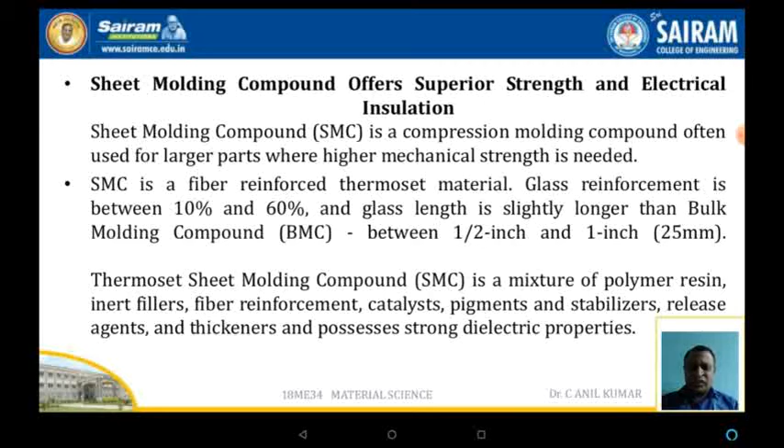The thermoset sheet molding compound or SMC is a mixture of polymer resin, inert fillers, fiber reinforcement, catalysts, pigments, stabilizers, and thickeners, depending upon the type of application where the SMCs are used.

Manufacture of the SMC is a continuous inline process. The material is sheathed both top and bottom with a polyethylene or nylon plastic film to prevent auto adhesion. The paste is spread uniformly onto the bottom film and chopped glass fibers are randomly deposited on the paste. The top film is introduced and the sandwich is rolled into a predetermined thickness. The sheets are allowed to mature for 48 hours.

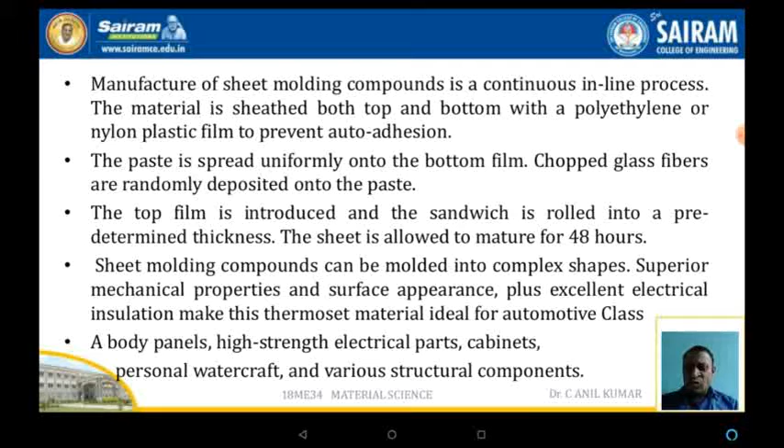The sheet molding compound can be molded into complex shapes. Superior mechanical properties can be achieved very easily. The surface appearance and excellent electrical insulation can also be maintained very easily throughout the material. Body panels, high strength electrical parts, cabinets, or personal watercrafts are some of the various applications with respect to this.

The schematic diagram of the SMC is as shown in this slide, which consists of the first one, the paste or matrix material, and the second, a chopped roving reinforced material, where both are mixed, and the mix is passed through compacting rollers, and afterwards what we obtain is a uniformly thickened sheet that is collected in a tank.

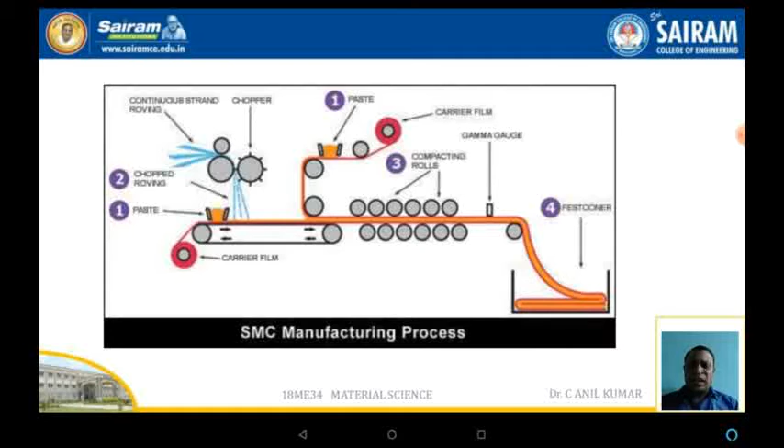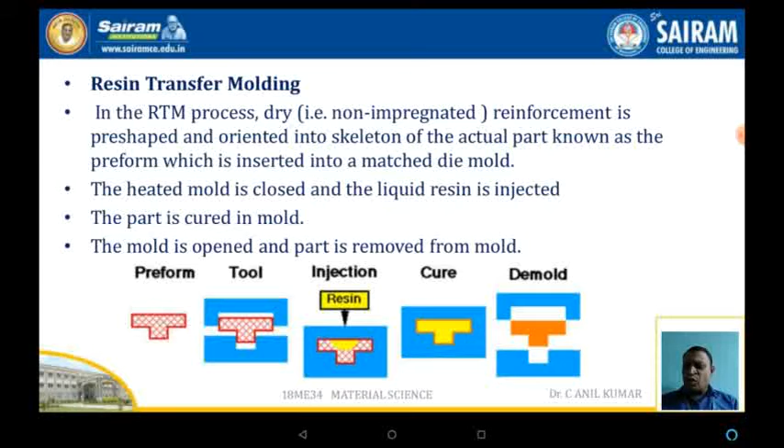The resin transfer molding, also called the RTM process. In the RTM process, either a dry reinforcement is pre-shaped and oriented into a skeleton of the actual part known as the preform, which is inserted into a matched die mold. The heated mold is closed and a liquid resin is injected. The part is cured in the mold. The mold is opened and the part is removed from the mold.

Transfer molding involves the following steps. The mold cavity is filled with preformed reinforcing fibers. The pre-weighed amount of polymer mixed with the additive and filler is placed into the transfer pot. The charge may be in the form of a powder, a pellet, a putty-like mass, or preformed blanks.

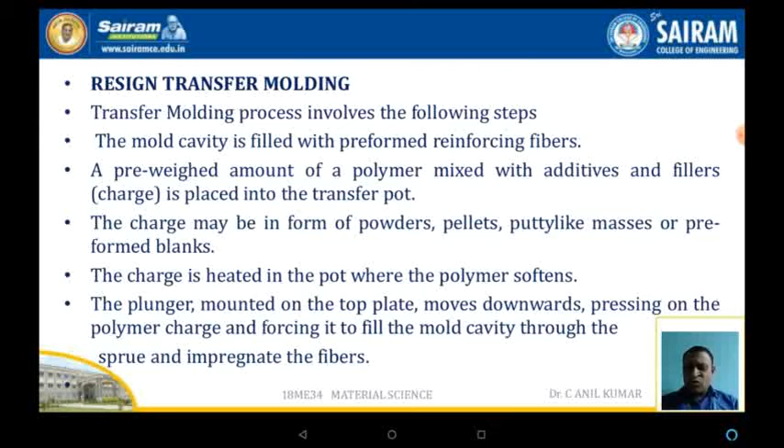The charge is heated in the pot where the polymer is softened. The plunger mounted on the top plate moves down, applying pressure over the mold and getting the required shape. The process is shown in the schematic diagram.

The top one is the plunger where the charge is placed in the transfer pot, and below that a sprue will be there. Below the sprue a mold cavity will be there. Because of the load applied by the plunger, the charge is transferred through the sprue to the mold cavity. Through the ejector, the dies can be opened and the component obtained.

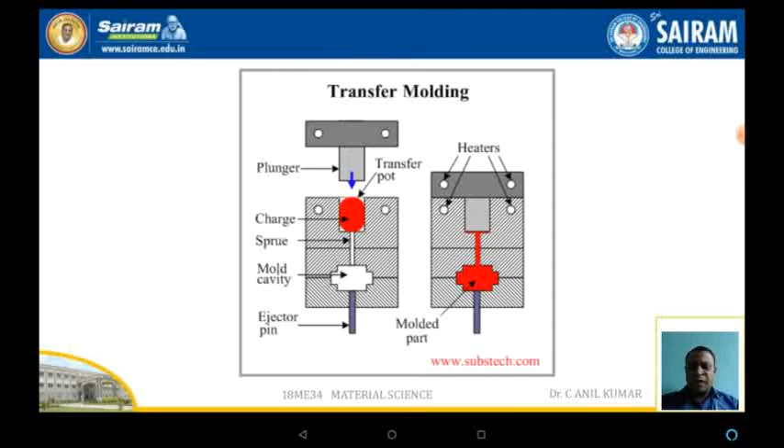The mold equipped with a heating system provides curing of the polymer. The mold is opened and the part is removed by means of ejector pins. If the thermosetting resin is molded, the mold may be opened in the hot state. Cured thermoset maintains its shape and dimension even in the hot state. When thermoplastic is molded, the molded parts are cooled down before opening.

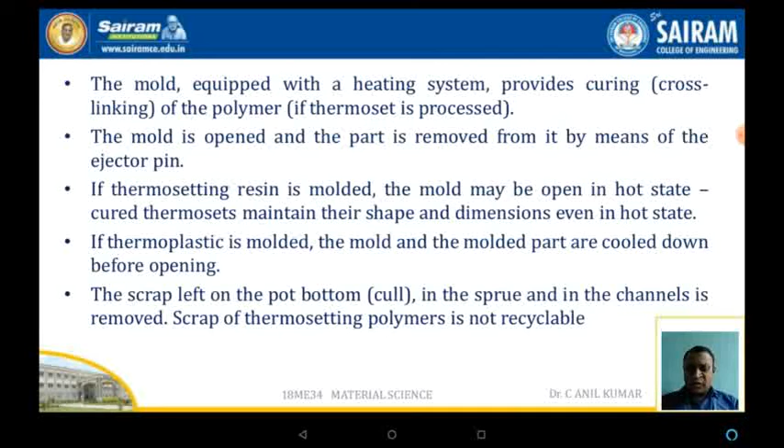The scrap left on the pot bottom in the sprue and channel is removed. The scrap of the thermosetting polymer is not recyclable.

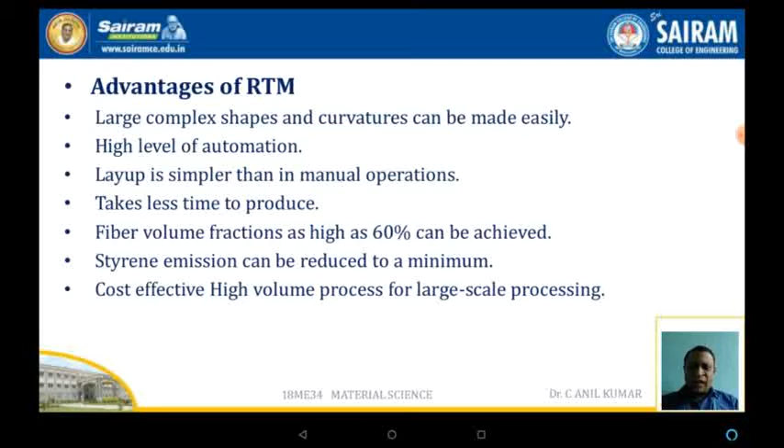The advantages of RTM: large complex shapes and curvatures or integrated shapes can be cast very easily. High level of automation - the layup is simpler than manual operation. RTM takes less time to produce. Fiber volume fraction as high as 60% can be achieved very easily. Styrene emission can be reduced to a minimum. It's a cost effective high volume process for large scale processing.

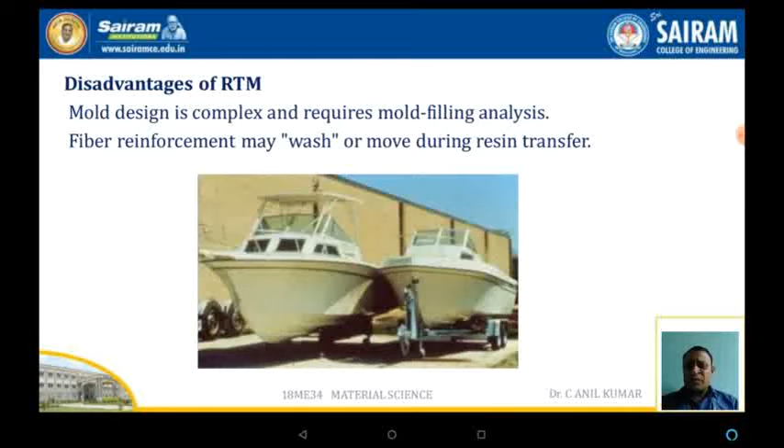The disadvantages of RTM: the mold design is complex and requires mold filling analysis. The fiber reinforcement may wash or move during the resin transfer. Here the boats are shown which have been fabricated using the RTM process only.

The next topic is the metal matrix composite. Metal matrix composites are composites with at least two constituent parts, one being the metal, the other being a non-metal, or it may be a ceramic material, or it may be an organic compound.

MMCs are made by dispersing the reinforcing material into a metal matrix, driven by the current industrial need for lightweight as well as high performing materials. The MMCs have emerged as the strongest contender against the monolithic materials as well as the alloys.

MMCs are used in aerospace industries, marine industries, and automotive industries. Aluminum metal matrix composites have a major application compared to other materials.

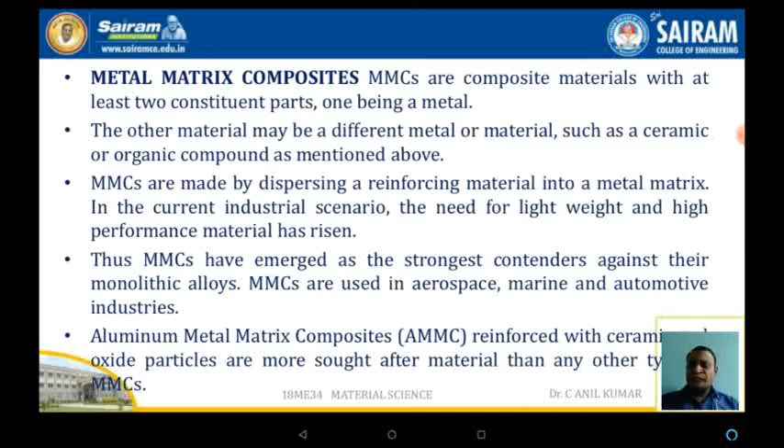This is because of the high strength to weight ratio, high specific modulus, low thermal expansion, and excellent tribological properties. These properties depend upon the size, shape, weight percentage, and distribution of the reinforcement in the metal matrix.

Some of the applications with respect to AMMCs are aeroplane panels, aircraft structures, automotive brake discs, cylinder linings, driving shafts of automobiles, electrical contacts and electronic packaging, fuselage of helicopters, marine structures, missile panels, etc. The application with respect to AMMC is maximum compared to other industries.

It also has applications in aerospace industries, aircraft industries, automotive industries, electrical industries, and even sports applications.

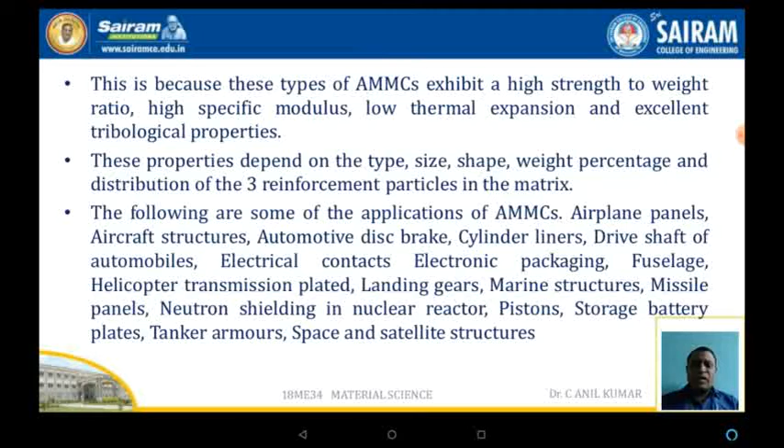Stir casting is one of the basic methods normally adopted in the case of MMC. Stir casting is a type of casting process in which a mechanical stirrer is introduced to form a vortex as well as to mix the reinforcement in the matrix material.

It is a suitable process for the production of MMC due to its cost effectiveness and applicability to mass production, simplicity, almost net shaping, and easier control of the composite structures.

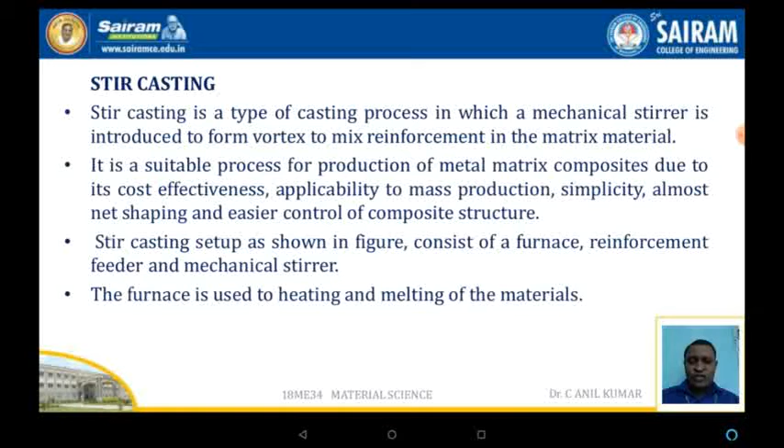The stir casting setup, as shown in the figure, consists of the furnace, reinforcement feeder, as well as the mechanical stirrer. The furnace is used for heating and melting the material.

The schematic diagram shows the stir casting technique. It consists of the furnace, inside which a crucible is present. Inside the crucible the metal is melted, where the heating is done using the furnace.

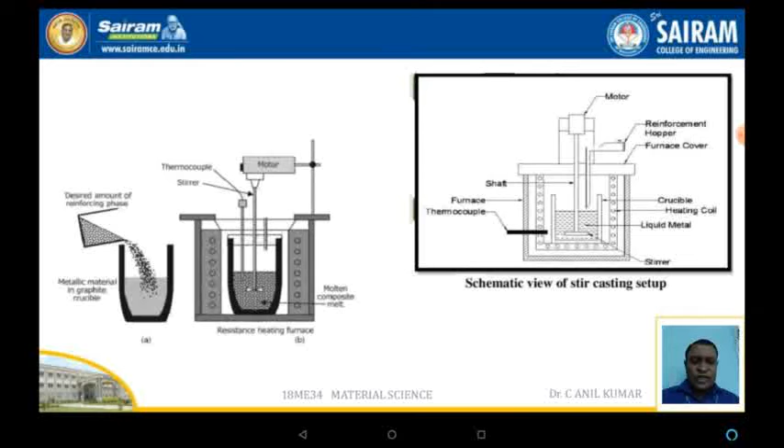A reinforcement hopper is fixed where the reinforcement is fed through the hopper. The motor is used to stir and mix the matrix as well as the reinforcement. The stirrer is normally made of graphite.

The bottom pouring furnace is more suitable for stir casting, as stirring and mixing the slurry before pouring is required to avoid settling of the solid particles, which is nothing but the reinforcement. The mechanical stirrer is used to form the vortex which leads to mixing of the reinforcement material introduced into the melt.

The stirrer consists of the stirring rod as well as the impeller blade. The impeller blade geometry varies, and even the number of blades varies. Flat blades with a number of 3 are preferred as they lead to the axial flow pattern in the crucible, with lesser power consumption.

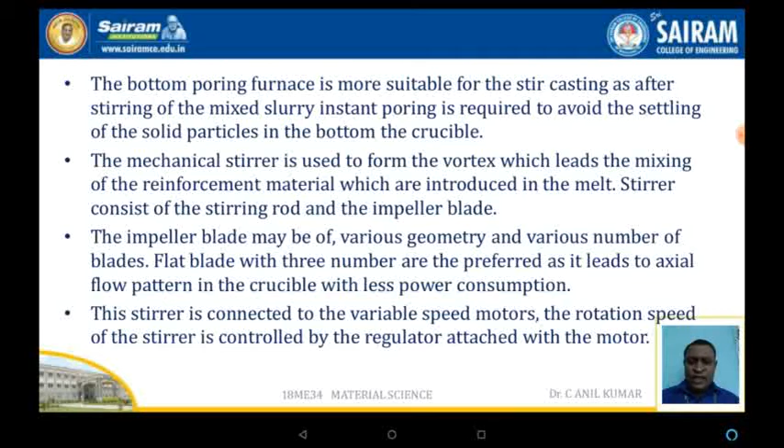The stirrer is connected to a variable speed motor. The rotation speed of the stirrer is controlled by a regulator attached to the motor. Further, the feeder is attached to the furnace and used to feed the reinforcement powder into the melt.

The permanent mold, sand mold, or lost wax mold can be used for the pouring as well as mixing of the slurry.

In some cases, degassing agents are also used to remove the impurities or gases produced in the process.

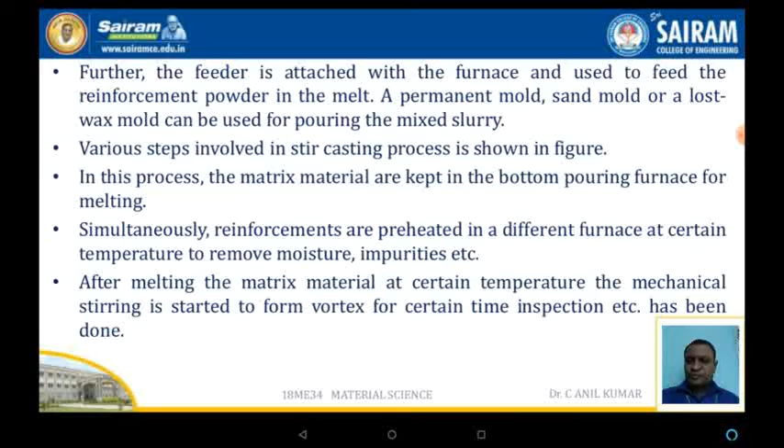Now, the various steps involved in the process are explained using the block diagram: the melt of the matrix material, the stirring of the matrix material, the feeding of the reinforcement, and the continuous stirring of the matrix as well as the reinforcement.

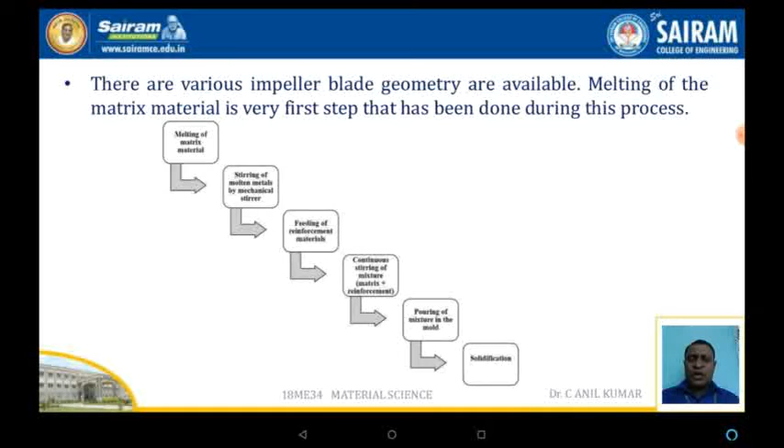Afterwards, pouring into the mold and then solidification. This is the process normally adopted in MMC, or it may be called the stir casting technique.

Squeeze casting or squeeze infiltration is another technique normally adopted for MMCs. Squeeze casting infiltration is a forced infiltration method of liquid phase fabrication of MMC using a movable mold part called a ram, for applying pressure on the molten metal and forcing it to penetrate and infiltrate a dispersed phase placed into the lower fixed mold.

The squeeze casting infiltration method is similar to the squeeze casting technique, but it is used for metal alloys as well as the castings of MMCs.

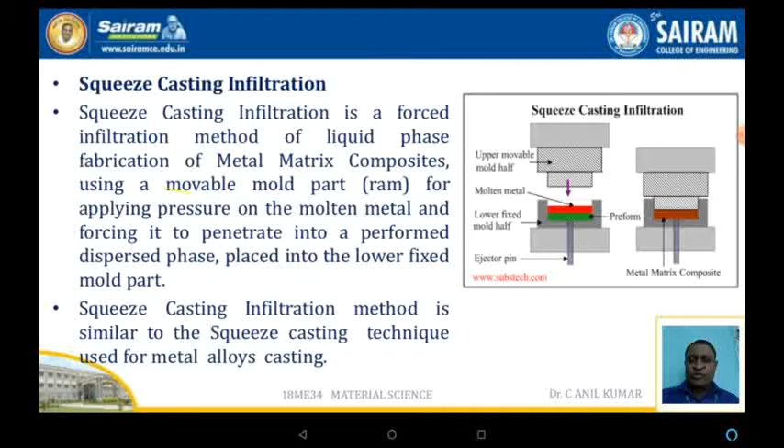Powder metallurgy is the name given to the process by which a fine powder material is blended, pressed into a desired shape, and then heated and bonded to form a component. It is typically used when a large amount of small or intricate parts with high precision is required.

Powder metallurgy techniques are adapted because little material waste occurs and unusual mixtures can be utilized very easily. The parts are used in the automotive industry, household appliances, and some applications even in the aero industries.

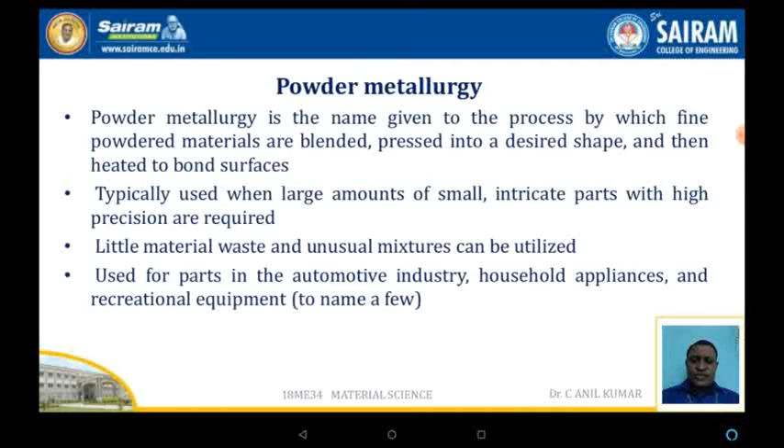Powder metallurgy science involves producing the metal powder and making the finished or semi-finished object from a mixed or alloyed powder, with or without the addition of non-metallic constituents. The steps involved in powder metallurgy are powder production, mixing or blending, compaction, and sintering.

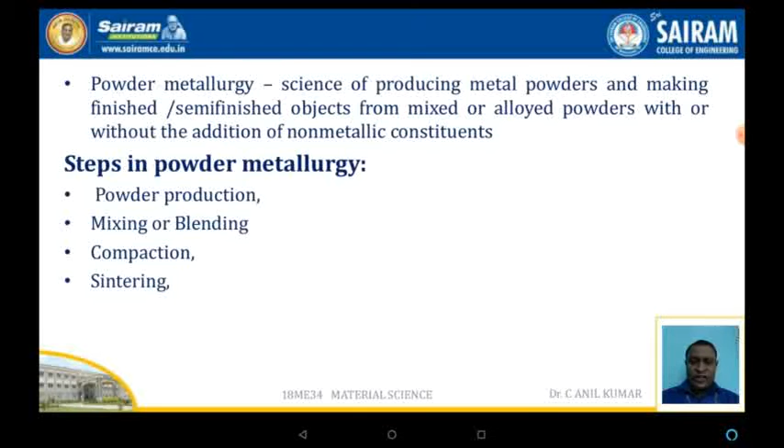Powder preparation is the first and basic step involved in the powder metallurgical technique, where the powder form of the metals is used as a base material. There are various processes to produce the metallic powder, either by means of atomization, grinding, chemical reaction, or electrolysis process, etc.

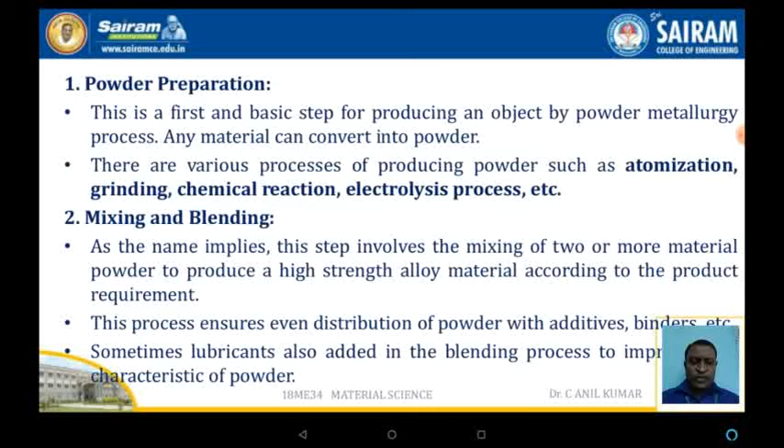Mixing and blending is the second step, in which the reinforced material is mixed with the raw material, which is nothing but a powder. This process ensures distribution of the powder with additives and binders, etc. Sometimes lubricants are also added in the blending process to improve the characteristics of the powder.

Compacting means compressing the prepared powder mixture into a predefined die. This step ensures the reduction of voids and increases the density of the product. The product is compacted into the mold by application of pressure, varying from 80 to 1600 MPa depending upon the size of the component and the material used. The pressure depends upon the properties of the metal powder and also the binders used in the process.

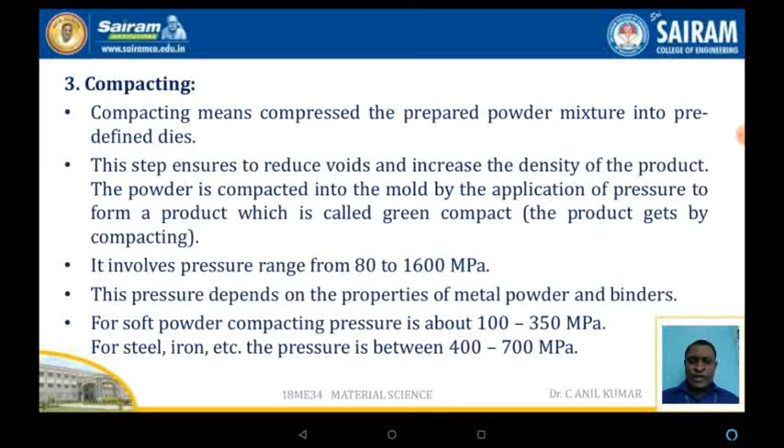Sintering: the green compact produced by compressing is not very strong and can't be used as a final product. This step involves heating the green compact to an elevated temperature where permanent strong bonding will take place between the particles or crystals. This process provides strength to the green compacted component. The sintering temperature is normally 70 to 90% of the melting temperature of the metal powder.

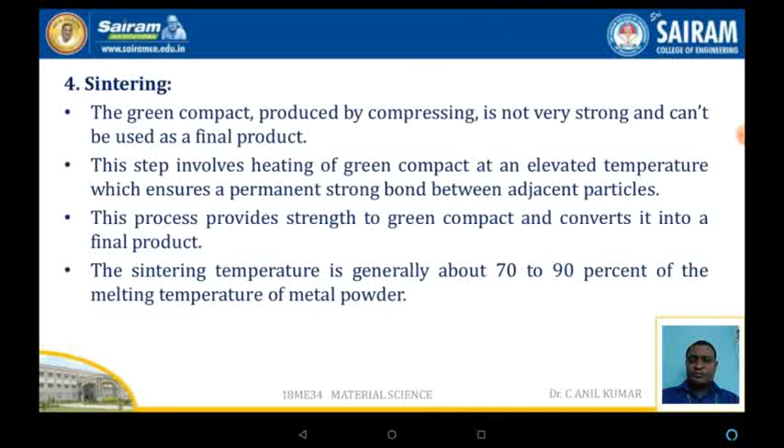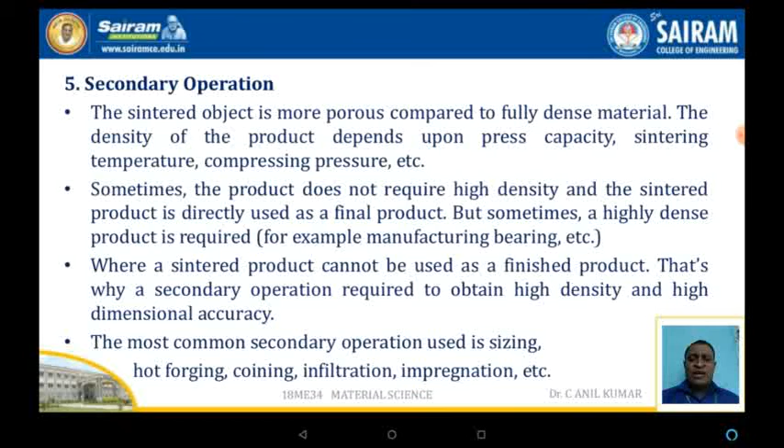Secondary operation: the sintered object is more porous compared to fully densed material. The density of the product depends upon the press capacity, sintering temperature, or compressing pressure. Sometimes the product does not require high density and the sintered product is directly used as the final product. The most commonly used secondary operations are sizing, hot forging, coining, infiltration or impregnation, etc. In most cases secondary operations are not required, but in some cases they are essential.

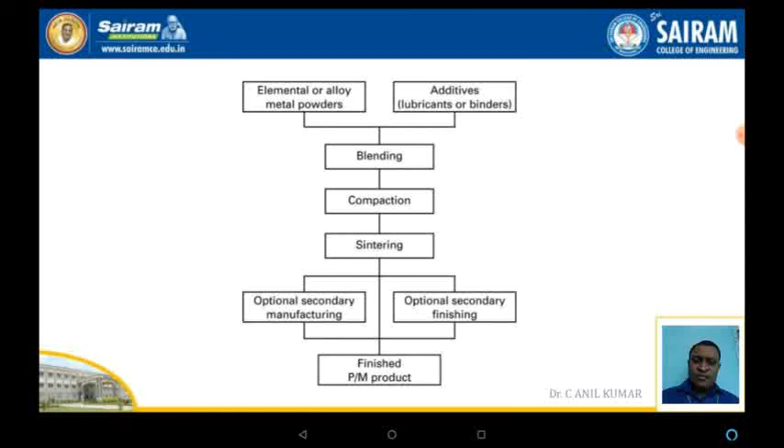This is a flow process of the powder metallurgy technique. First, the powder material is blended, compacted, and sintered. After sintering, secondary operations may be required depending upon the type of material. Lastly, what we obtain is the finished component. This schematic diagram shows the powder metallurgical technique and how the powder metallurgical part is obtained in the process.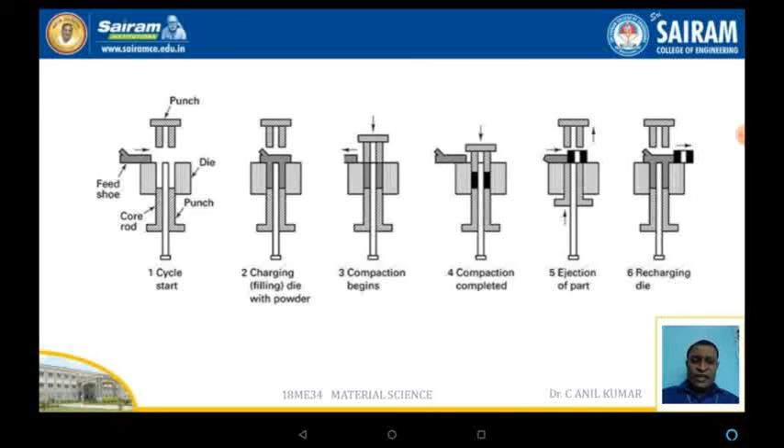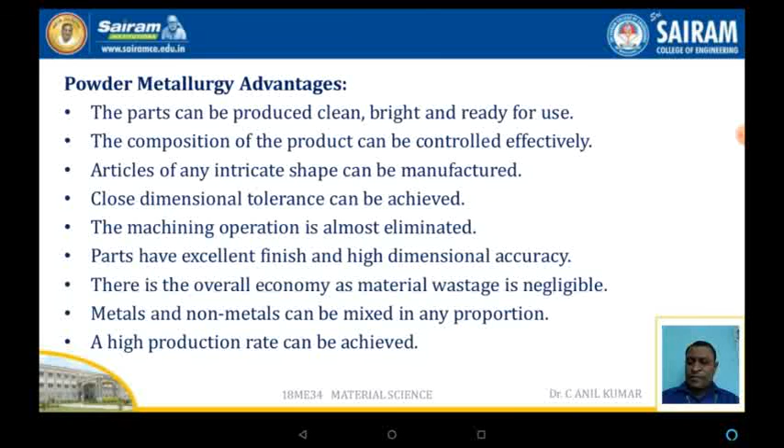Powder metallurgical advantages: the part can be produced clean, bright, and ready to use. Articles of any intricate shape can be manufactured very easily. Close dimensional tolerance can also be achieved, and even machining operations are eliminated. The parts have excellent finishing and high dimensional accuracies. Metals and even non-metals can be mixed very easily in any proportion, and a high production rate can be achieved.

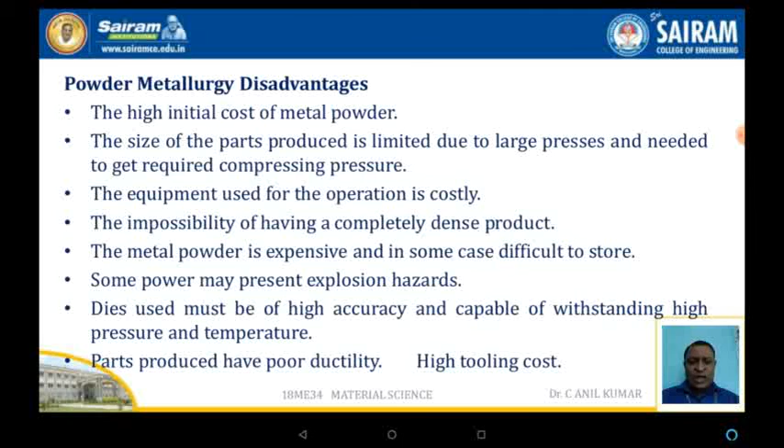Applications include producing porous products, and most of the automobile and aircraft parts are fabricated using powder metallurgical techniques. Even Babbitt bearings for automobiles are fabricated using this technique, to produce oil pumps, gears for automobiles, and also some major applications in the case of cutting tools. Even diamond impregnated tools are also fabricated using this technique.